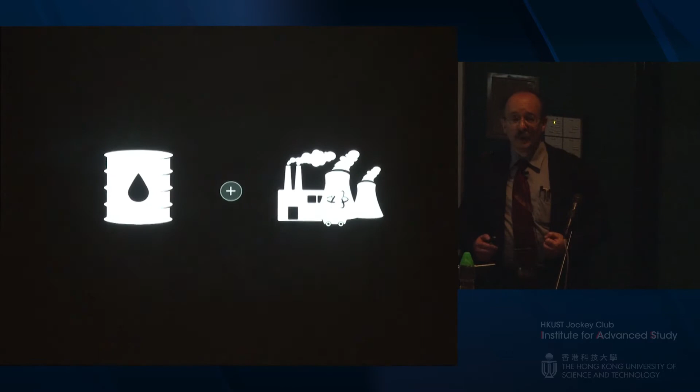4/5 of the world's energy still comes from burning each year about 20 cubic kilometers of the rotted remains of primeval swamp goo. Those fossil fuels have built our civilization, created our wealth, enriched the lives of billions of people, but their rising costs to our security, health, environment, economy are eroding, if not actually outweighing their benefits. So we need a new fire. And switching from the old fire to the new fire means changing two big stories, oil and electricity, each of which puts 2/5 of the fossil carbon into the air.

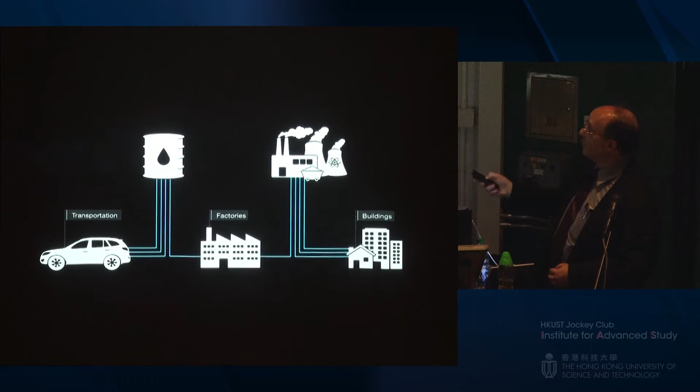These stories today are less than 1% connected in the United States, only a few percent connected in the world, but their uses are similarly concentrated. 3/4 of the oil in the United States, for example, fuels transport, 3/4 of the electricity powers buildings, and the rest of both run factories. So very efficient vehicles and land use, buildings, factories will save oil and the coal that makes 2/5 of the world's electricity, and natural gas that can displace them both.

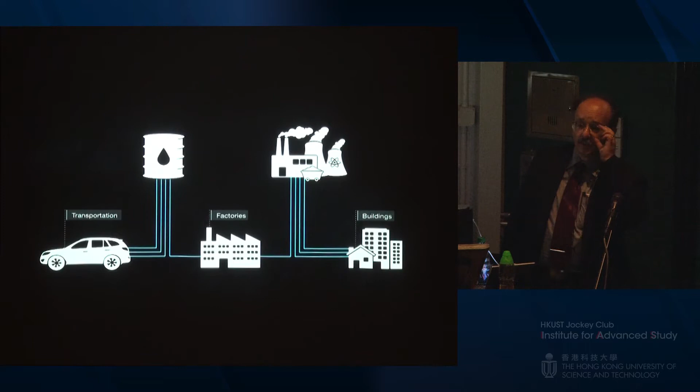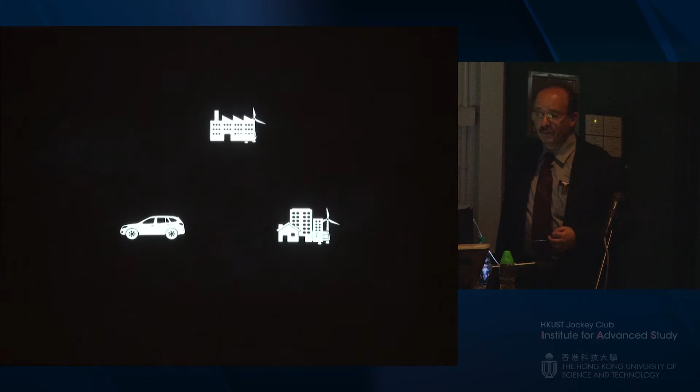But today's energy system is not just inefficient, it's also disconnected, aging, dirty, and insecure, so it needs refurbishment. By 2050, though, it could become efficient, connected, and distributed with elegantly frugal vehicles, buildings, and factories, all relying on a secure, modern, and resilient electricity system.

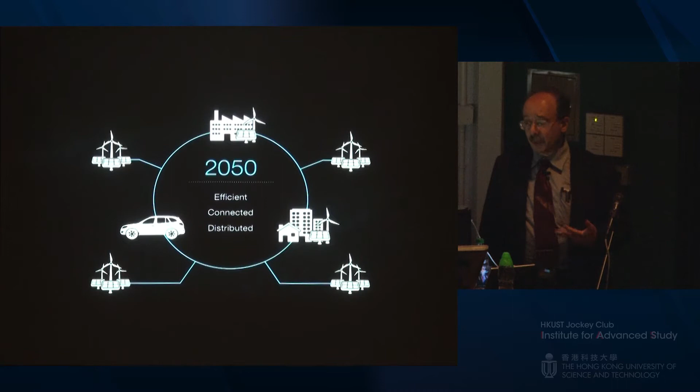The United States, for example, could eliminate its addiction to oil and coal by 2050 and use a third less natural gas, whilst switching to threefold more efficient use and three-quarters renewable supplies. That's the transition I will summarize.

We found that by 2050, this could cost the United States $5 trillion less in net present value than business as usual, assuming that all carbon emissions and other hidden or external costs are worth zero, a conservatively low estimate. But this cheaper energy system could support a 2.6-fold bigger economy, all without needing any oil, coal, or nuclear energy.

This transition would need no new inventions and no new national taxes, subsidies, mandates, or laws, thus going around Washington gridlock. So I'm going to tell you how the United States can get completely off oil and coal, $5 trillion cheaper, with no act of Congress, led by business for profit. Many policy changes are needed to enable and speed this transition, but they can all be done administratively or at a subnational level.

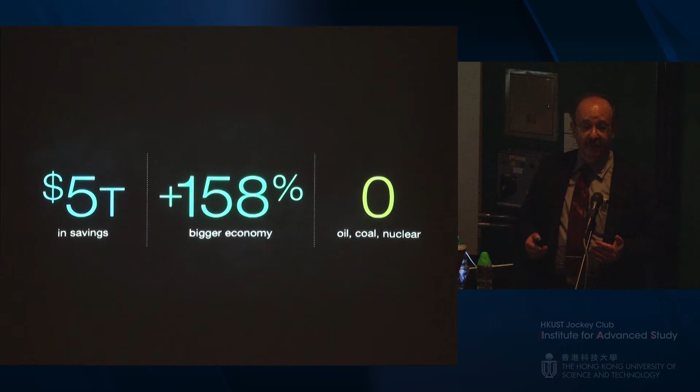In the United States, as in China, the mountains are high and the emperor is far away, and much of our initiative comes from the subnational level, for example from the SAR. So don't think that what you do in this small place is unimportant - it can have a huge influence on all of China, Asia, and the world.

And in the United States, of course, we've long made most of our energy policy at the state level anyway, rather than the national level.

So the idea is to use our most effective institutions, which in America means private enterprise co-evolving with civil society, sped by military innovation, to go around our least effective institutions. And this is also trans-ideological, because whether you care most about profits and jobs and competitive advantage, or national security, or environmental stewardship, creation care, climate, public health, reinventing fire makes sense and makes money.

Now, normally, if we have a tough problem, we take the cleaver and try to chop it into smaller bite-sized pieces, but this actually makes it more difficult. General Eisenhower had some better advice: that expanding the boundaries of a tough problem makes it soluble by including more options, more synergies, more degrees of freedom - everything that the solution requires. So we need to move the boundaries of the problem out, not in.

Therefore, in Reinventing Fire, we integrated all 4 sectors that use energy: transport, buildings, industry, and electricity. And we integrated 4 kinds of innovation - not just technology, but also design, the way technologies are combined, and not just public policy, but also new business models and new competitive strategies. These combinations give much more than the sum of their parts and often create some deeply disruptive business opportunities.

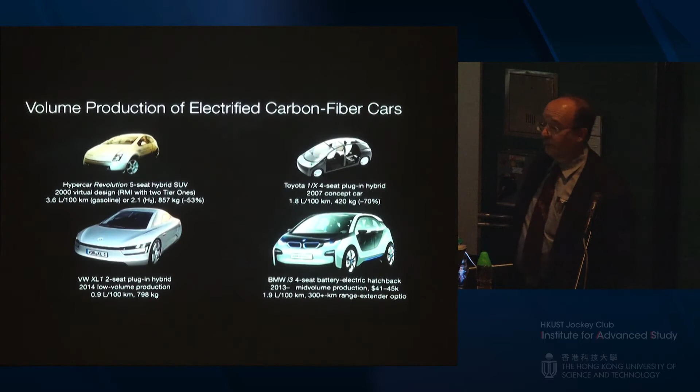And now 1 and 2 liter equivalent per 100 kilometer carbon fiber electric cars are on the market from Volkswagen and from BMW, which confirm that the carbon fiber is paid for by needing fewer batteries.

I brought along a carbon cap today. It's a test piece for military helmets that have been shipping for a few years. It's a bit of carbon fiber and thermoplastic that was made with a process one of our spin-offs developed and then spun off to the global supply chain 2 years ago.

This process that made this part in 1 minute 8 years ago can now make a complex 2x2 meter part in 1 minute. Don't worry about dropping it - it's tougher than titanium. The journalist Tom Friedman hit it with a sledgehammer as hard as he could and couldn't even make a mark on it.

So if we made all US autos in this way, we would save 1.5 Saudis, or half an OPEC worth of oil - 15 million barrels a day - by drilling in a very prospective play called the Detroit Formation. And the cost of saving a barrel this way is about $18 and falling.

That's to pay for the electrification. The ultralighting turns out to be approximately free, paid for by the 3 times smaller powertrain and by much simpler automaking with 80% less capital. There are so few parts and they snap precisely together without needing a body shop or a paint shop.

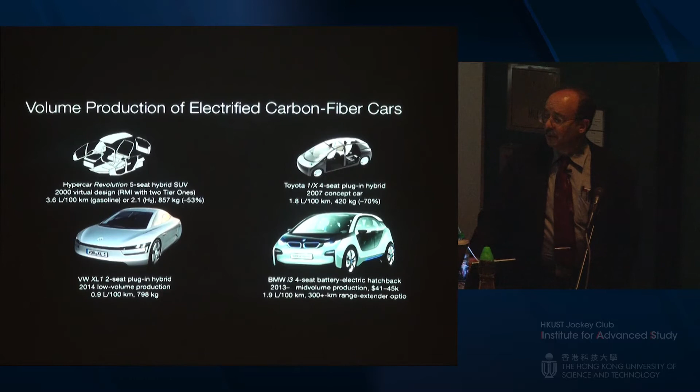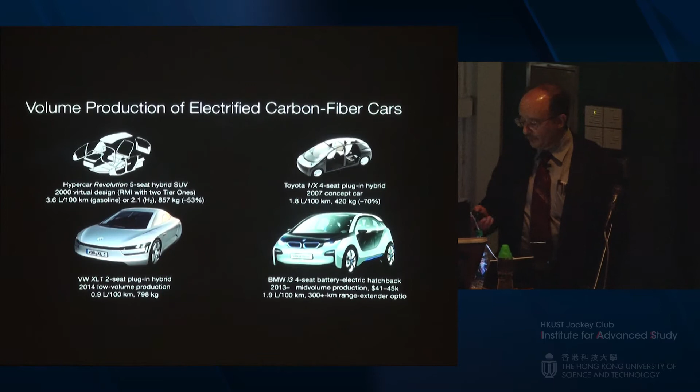Now, ultralight electric vehicles can spread and their prices can drop even faster with a temporary policy called a feebate, that is rebates for efficient new cars paid for by fees on inefficient ones. The biggest of 6 feebate programs in France tripled the speed of improving auto efficiency in the first 2 years, and the strongest feebate in Norway raised electrified vehicles market share to 12.5% last year, which is 10 times the US level. There is also a new feebate in Singapore.

The same sorts of physics and business logic apply also to heavy vehicles. Walmart's heavy lorries now move each case of product using half the fuel that they used 10 years ago through both logistical and technical improvements. And that plus just the technological improvements fully pursued can save 2/3 of the fuel in heavy lorries. And that plus the tripled to quintupled efficiency airplanes designed at Boeing, NASA and MIT can save the United States $0.9 trillion US net present value.

But in both heavy and light vehicles, today's military revolution in energy efficiency will speed all these advances in the civilian sector, which uses over 50 times as much oil, much as military R&D gave us the internet, the global positioning system, the jet engine and microchip industries, only this time that leverage back to the civilian sector can speed America's and China's path off oil so nobody needs to fight over oil, and our respective warfighters can have zero missions in the Persian Gulf and the South China Sea. Mission unnecessary. They really like that idea.

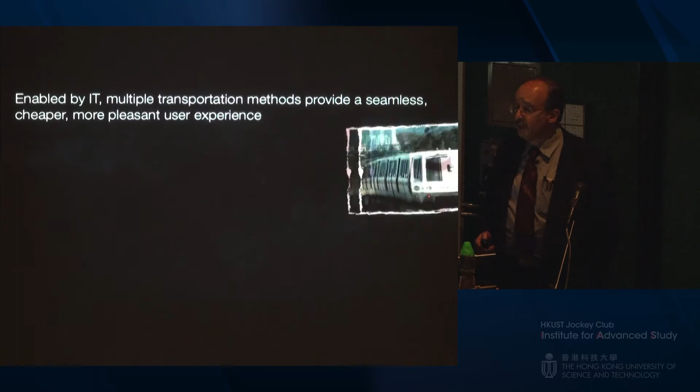Autos are not just becoming 4 to 8 times more efficient, they're also being driven less, even in Europe and America, where petrol use has been falling since 2007. Generations X and Y tend not even to want to own a car because it's cheaper and easier not to. A young Londoner or Shanghainese on an evening out can combine many different modes because smartphone apps bridge the once awkward route gaps by summoning ubiquitous transport services on demand.

One lady in San Francisco just blogged that she was saving $11,000 US a year by replacing her car with Uber, Lyft, public transit like the local version of the MRT, walking, biking, and a smartphone app called Getaround, which lets you hire a neighbor's car when it's unneeded and parked, as US cars are 96% of the time. So seamlessly linking access options with needs makes you confident you won't need a car. But if you did, you don't need to own it.

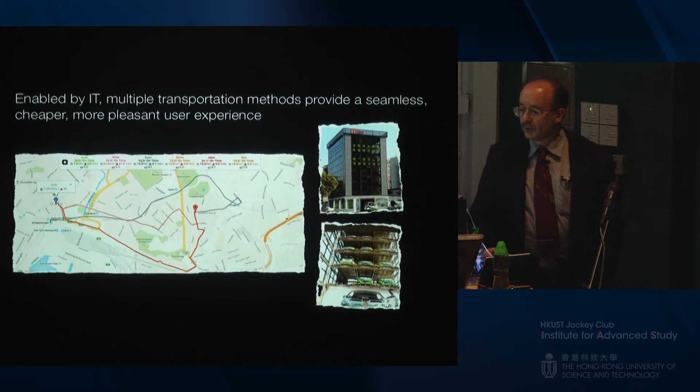In some Chinese cities, renting a Kandi electric vehicle from this giant vending machine costs about 25 Hong Kong dollars an hour. Also, renting shared cars when you need them can boost their utilization by about tenfold, and then probably redouble it with partly or fully autonomous vehicles like this Mercedes concept car.

Google actually plans to release self-driving cars in the next 3 years. The biggest American company, which is called Apple, is developing them too. They're already legal in 4 of the United States, and they are the theme of the European Union presidency by Holland next year.

Autonomy makes electric vehicles' total cost per kilometer about 40% lower than that of fueled vehicles because their tenfold lower energy cost per kilometer more than offsets their higher capital cost. So the mashup of mobility with IT means radically fewer vehicles, all electric, driving a lot fewer total kilometers. Shared EVs providing mobility services could drive easily 1 million kilometers in their lives because the carbon fiber doesn't dent, rust, or fatigue. So autos are morphing, as we made up this acronym, from pigs to seals, that is, from personal internal combustion gasoline steel-dominated vehicles to shareable electrified autonomous lightweight service vehicles.

Their business and marketing case is strong, and they will further speed the day when cars use no oil.

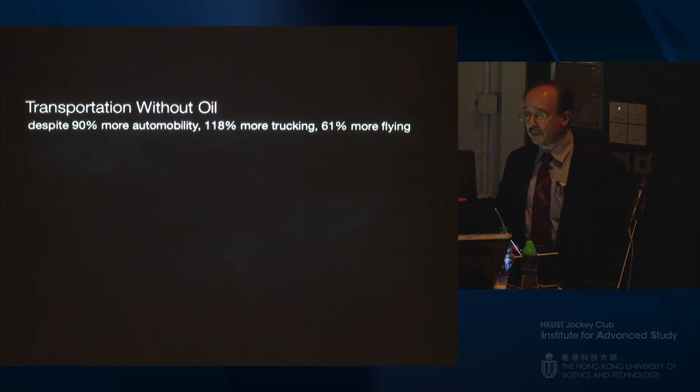Saving or displacing each barrel at an average cost that works out to about $25 US, rather than buying it for over 100, saves about $4 trillion net present value, or about 12 trillion if we'd counted just the hidden economic and military costs of US oil dependence.

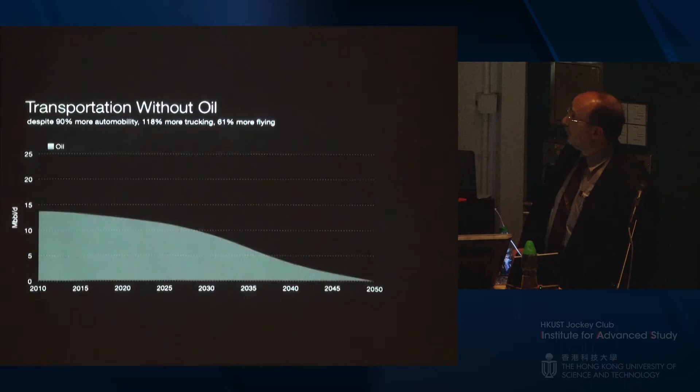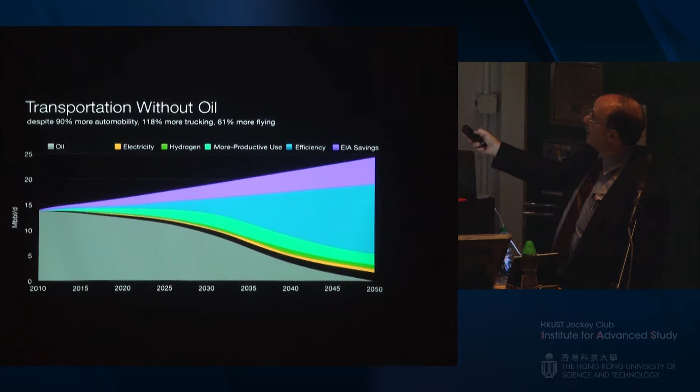In green, electricity in yellow, and advanced biofuels in orange. The heavy lorries and airplanes can realistically use advanced biofuels or hydrogen. The lorries could even burn natural gas, but no vehicles will need oil.

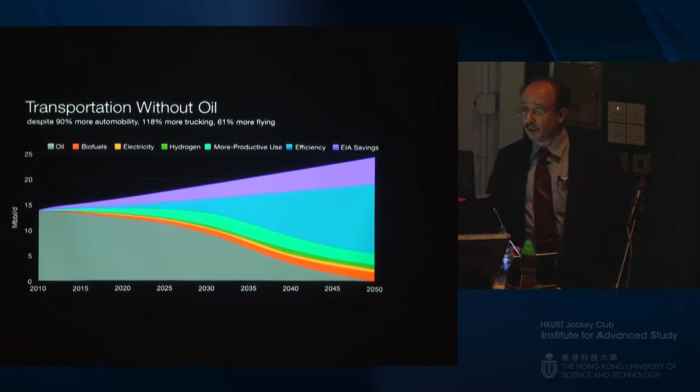And any biofuels the U.S. might need, at most 3 million barrels a day, could be made two-thirds from waste and without displacing cropland or harming climate or soil. So our little team speeds these oil savings by institutional acupuncture.

That is, where the business logic is congested and not flowing properly, we insert little needles in carefully chosen spots in partners like Ford and Walmart and the Pentagon to get that entrepreneurial juice flowing. And this long transition is already so well underway that 5 years ago, some mainstream analysts began to see peak oil not in supply but in demand.

Because like whale oil in the 1850s, oil is becoming uncompetitive even at low prices before it becomes unavailable even at high prices.

But electrified autos need not add new burdens to the electricity system. Rather, when smart autos exchange electrons and information through smart buildings with smart grids, they are adding to the grid valuable flexibility and distributed storage that can help the grid to accept varying solar and wind power. So electrified autos make the auto and electricity problems easier to solve together than separately.

And they also converge the oil story with our second big story.

And by the way, the guy that said that just got promoted.

Our second big story, which is saving electricity and then making it differently. And those twin revolutions in electricity are already bringing more numerous, diverse, and profound disruptions than in any other sector, as 21st century technology and speed collide head-on with 20th and even 19th century institutions, rules, and cultures.

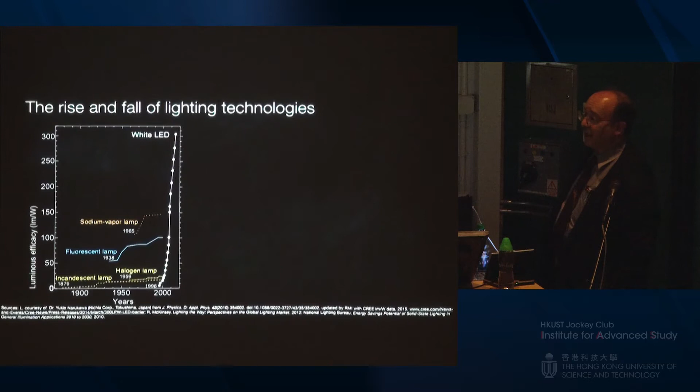But then, like a thunderbolt, came white LEDs. Each decade, they get 30 times more efficient, 20 times brighter, and 10 times cheaper. That's why McKinsey forecasts they will cut costs and grow revenues 30% a year, and 5 years from now will have taken over two-thirds of the world's general lighting market.

So they're rocking the $200 billion a year lighting services market, and since lighting uses one-seventh of the world's electricity, they're also disrupting the business model of electric utilities because it's the wrong model.

You see, Thomas Edison, when he developed the grid in the early 1880s, didn't sell kilowatt hours. He sold light. He would charge you a penny to run a lamp for an hour. And he probably didn't foresee that his lamps would ultimately become so antique they would be outlawed.

But he certainly did see that lamps would become far more efficient. He said to his colleagues who wanted to stop selling light and start selling kilowatt hours so they could serve motors as well, look, I can tell you as an inventor, lamps will become much more efficient. And when they do, if we're selling lighting services, our cost of providing that service will go down. Whereas if we're selling kilowatt hours, we will simply sell fewer of them. It's the lamp makers who will make the profit.

They overruled him in 1892 at the New York Edison Company, and we've been making the same mistake ever since, selling the kilowatt hour, not the service people want it for, and therefore ensuring that as customers get more efficient, the electric company will have less revenue rather than less cost.

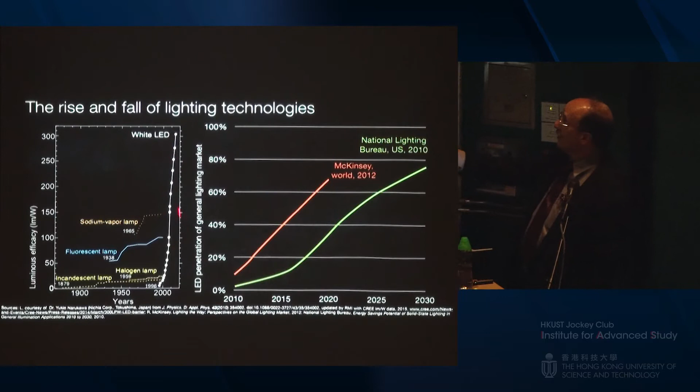Please remember, by the way, the steep slope of this LED efficiency curve, because we're going to see it again in a few minutes in a graph of the cost of photovoltaics, which in physics terms are rather like LEDs inside out.

Now, changing how we make electricity gets easier as we need less of it. Today, most of it is wasted, and efficiency techniques keep improving faster than they're installed, so the potential savings, the resource of negawatts still unbought, keeps getting bigger and cheaper. You know, the low-hanging fruit grows back faster than we can pick it.

But as buildings and industry start to catch up and get efficient faster than they grow, America's electricity use, instead of growing 1% a year as officially forecast, could actually shrink 1% a year after allowing for the extra use by efficient cars. And that's actually happening. U.S. electric use peaked in 2007, and we can keep it dropping by reasonably accelerating existing trends.

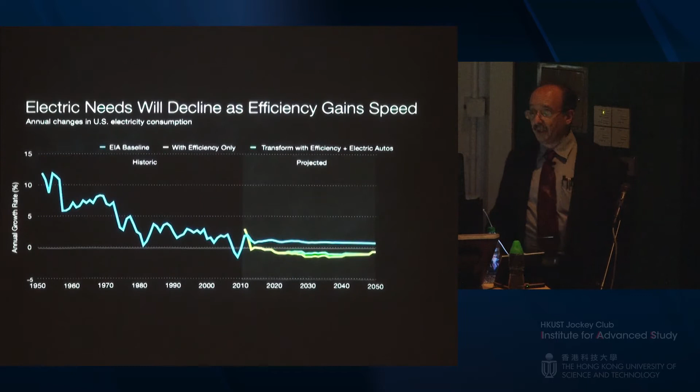Specifically, our analysis found over the next 40 years, U.S. buildings can triple or quadruple their energy productivity, saving $1.4 trillion US net present value with a 33% internal rate of return. So the savings are worth 4 times their cost.

Industry can also accelerate, doubling its energy productivity with a 21% IRR. And to do all that by 2050, we would need, by 2030, just to ramp up the national average adoption of efficiency to levels that were achieved 10 years ago in our northwestern states.

The key to such big savings is a disruptive innovation we've hatched at our institute called integrative design. It often makes very large energy savings cost less than small ones, turning diminishing returns into expanding returns.

I mentioned briefly how lightweighting autos shrinks their propulsion system, helping enable and pay for the advanced electric propulsion because you need 3 times fewer batteries. Well, in the same way, integrative design can do this for buildings and factories, radically reducing electric and gas demand so renewables can more readily serve the rest.

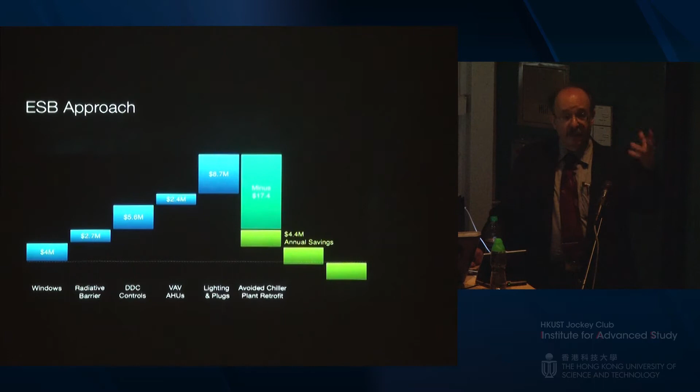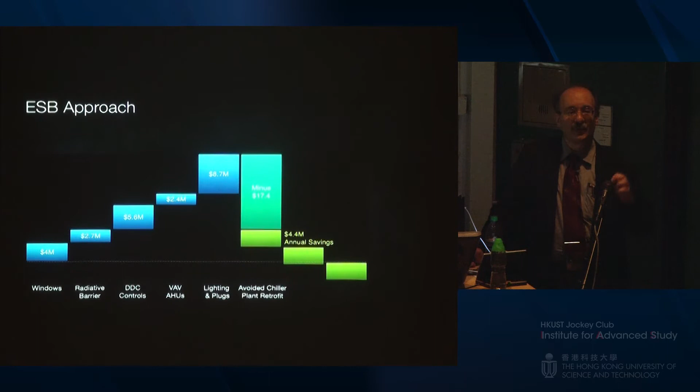Another example, in a retrofit design for an 18,000 square meter curtain wall office building in Chicago with dark double glazing whose seals had failed, so you have to replace them every 20 years, 3/4 of the total energy could be saved by an integrative retrofit costing slightly less than the regular 20-year renovation that saves nothing. It was about a negative 5-month payback.

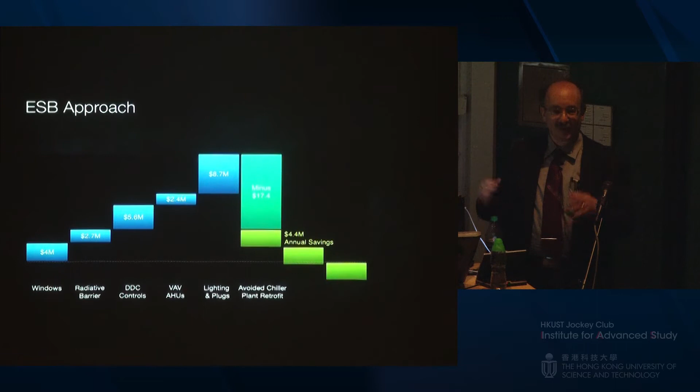And that's because the mechanical system could become not 1/3 smaller as in the Empire State Building, but 3/4 smaller, because it's all glass rather than mostly opaque wall area.

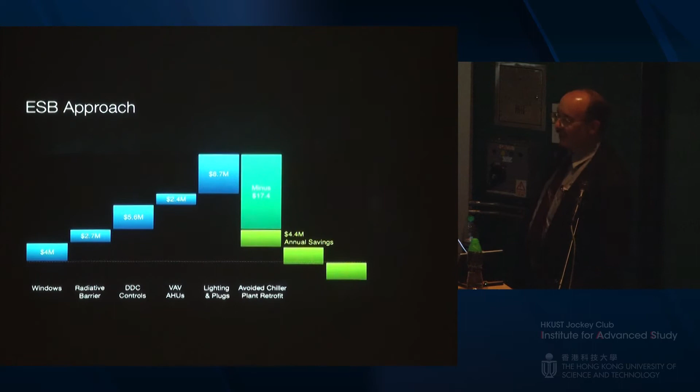Chicago is about as hot and humid in the summer as Hong Kong, but much colder in the winter. Let me give an example now for a small building, not because I think you have single-family houses here, but to make a point about building physics. It gets harder with small buildings because they have a bigger surface-to-volume ratio. My example is about how to create a little bit of Hong Kong climate high in the Rocky Mountains of western Colorado. That's where I live.

This is my house and research center and indoor farm. It's 2,200 meters up near Aspen, where temperatures used to dip as low as -44 Celsius, and you can get continuous midwinter cloud up to 39 days. This helped inspire over 30,000 European passive buildings that, like this one, need and have no heating system, but have roughly normal construction costs, and they can look like whatever you want.

Now let's go into the central atrium under super windows that insulate like 16 sheets of glass, but look like 2 and cost less than 3. And inside, it looks like Hong Kong or Hainan.

But this is in a February snowstorm, and there are 5 banana crops ripening. This is a twin crop we harvested recently - actually it harvested itself by pulling down the tree, and we're now on banana crop number 58.

When I moved in 1984, this house was saving 99% of the normal space and water heating energy, about 90% of the household electricity and half the water, all with a 10-month payback. That's 1983 technology. Today's are much better, so we've lately retrofitted them, and we're measuring how much better they are.

The trouble is that they seem to use less energy than the monitoring system that's measuring them. So we do no combustion in this house - that's so 20th century. And our house is a net exporter of electricity and bananas.

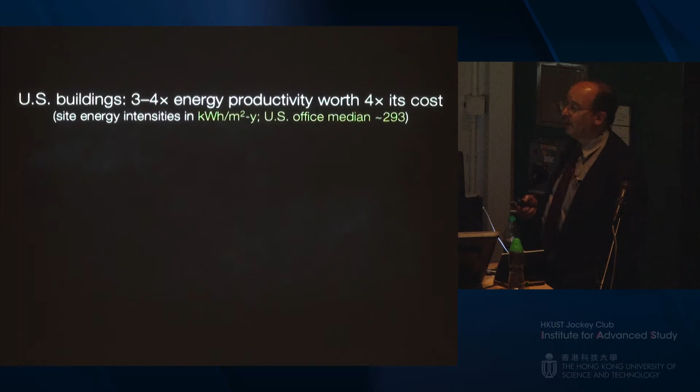How fast is the state-of-the-art moving? Well, we thought the 38% energy saving wasn't too bad for the Empire State Building when we did that retrofit 5 years ago. 3 years later, we saved 70% retrofitting this difficult old federal government office building in Denver, and with a good economic case.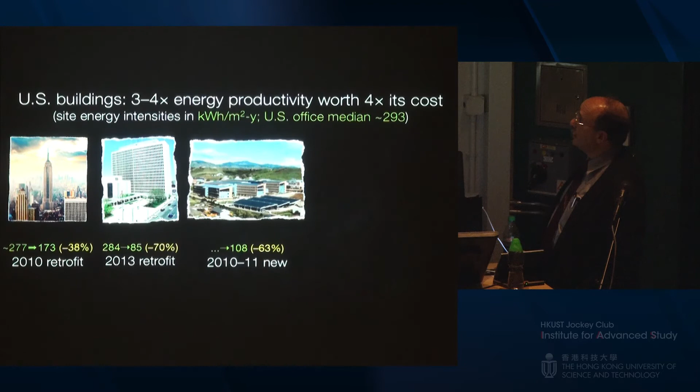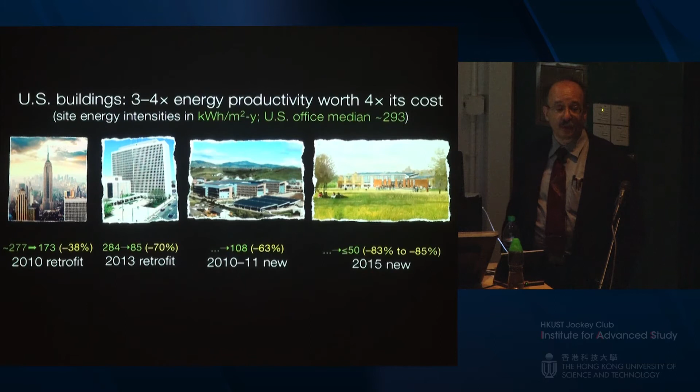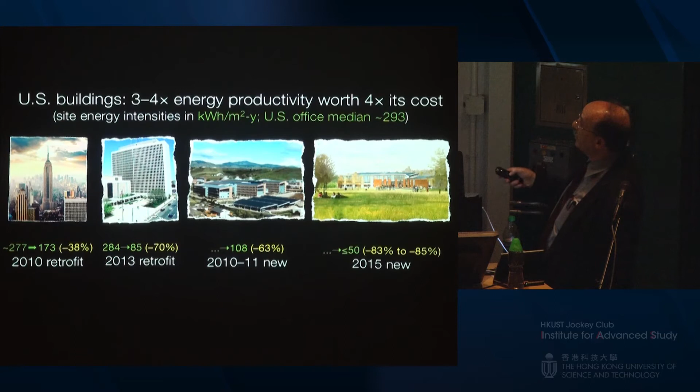And that made it a little more efficient than the most efficient new U.S. office, which in turn is only half as efficient as our own new office being built right now with no central heating or cooling equipment and a good business case. That's how fast the state of the art is moving - from 277, or a national median 293 kilowatt hours total energy use per square meter year measured at the building, to nowadays 40 or 50.

And actually somewhere in that range has already been achieved by the Bullitt Foundation office in cloudy Seattle. And of course, that building and our building are both net exporters of electricity. Even in the worst hot, humid climates, in Singapore and in India, our partners are likewise saving about 80% of the energy with 10 or 20% lower capital cost, and then the photovoltaics on the building make the rest.

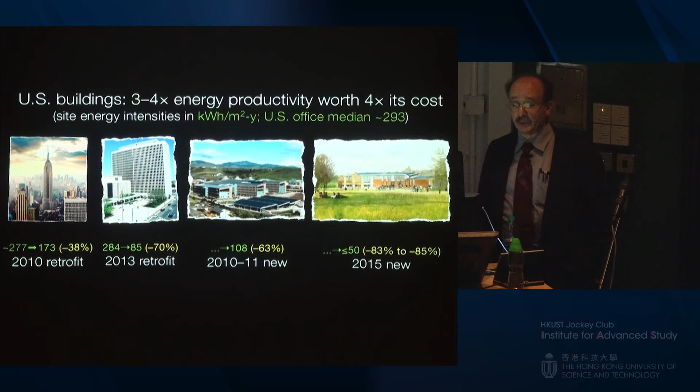And I think in Hong Kong you should demand similar performance, but here's an interesting opportunity. Dutch social housing, only say 2 stories high - this is a 5-unit building - has about a 1.5 or 2,000 euro per unit per year energy bill.

But now a consortium of the developer BAM, social housing corporations, and several public partners are doing mass efficiency upgrades of ordinary flats so they will produce at least as much solar energy as they use. That is, they're being retrofitted to net zero by the means described. And they are very close now, by industrializing the retrofit process in the first 11,000 units, to being able to do this without subsidy. They think they'll be without subsidy within about another year because the saved energy finances the retrofit, even to net zero standard.

Now, to be sure, Hong Kong has a completely different climate and culture and building style, but we could quickly learn by doing how close we can get in your high-rise housing to net zero energy, and how much of the retrofit can be standardized and mass-produced, as the Dutch designers are doing.

So there may also be some interesting side benefits. For example, if you do distributed capture of the distilled water from condensate, that should reduce the costs of buying water and having to pump it up in the building, which is a very large use of electricity in Hong Kong.

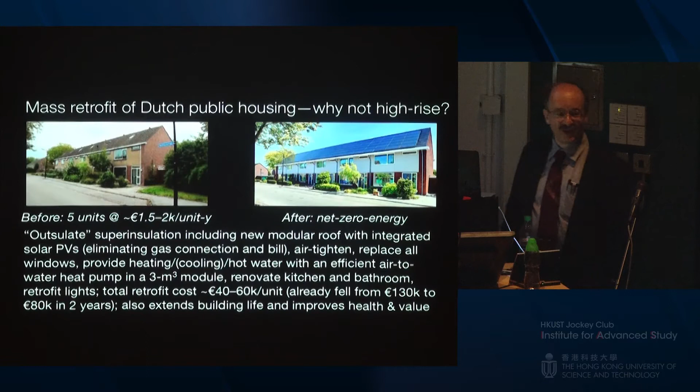Integrative design can also increase the savings in industry. Dow Chemical, for example, has saved $9 for every dollar it's invested in efficiency, but there's much more to do.

For example, 3/5 of the world's electricity runs motors, half of that runs pumps and fans, and we can make those much better. There are about 35 things we can do as an integrated package to save half the energy in the motor systems with about a year's payback.

But first, we should be capturing bigger and cheaper savings normally ignored, not in the textbooks, not in the forecasts. For example, pumps. The biggest use of motors move liquids through pipes.

But using techniques from my Chinese mentor Lee Eng Lock in Singapore, a typical industrial pumping loop for a Shanghai factory was redesigned to use at least 86% less pumping energy, within the normal 80 to 90% savings range. Not by getting better pumps and motors and controls, but just by replacing long, thin, crooked pipes with fat, short, straight pipes. This also shrinks the pumping equipment and its capital costs.

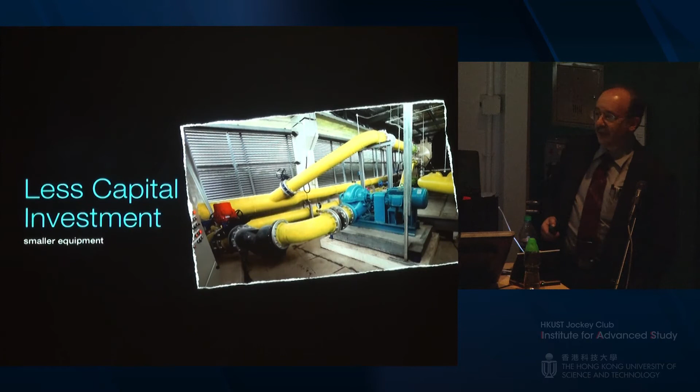So this is not a new technology. This is rearranging our metal furniture as designers. And in my own house, this method recently saved about 97% of the pumping energy in some new piping.

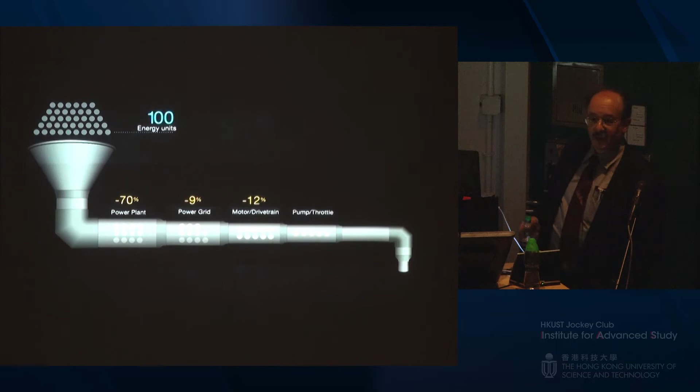Now, what does such savings mean for the electricity that is 3/5 used in motors? And I just told you about pumping, the biggest use of motors, and the second biggest use is fans, which have the same physics. Well, from the coal burnt in the power plant, there are so many compounding losses that only about 1/10 of the fuel energy comes out the pipe as flow.

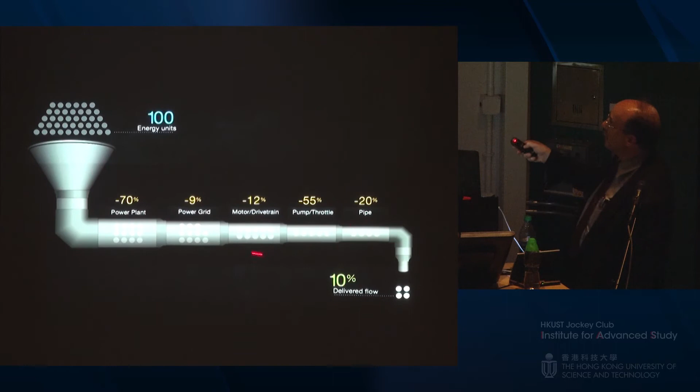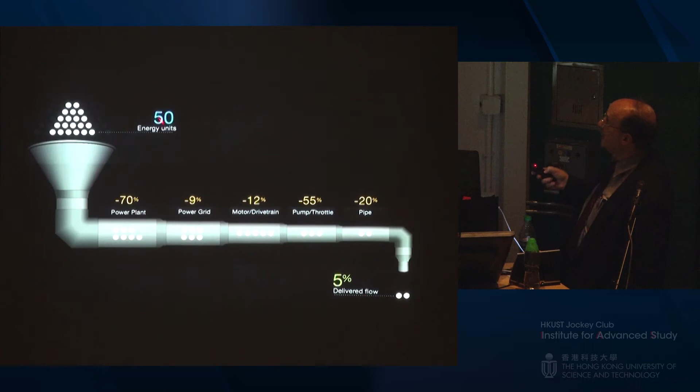But if we turn those compounding losses round backwards, right to left, they become compounding savings, and every unit of flow or friction we save in the pipe compounds back again to save 10 units of fuel cost, pollution, and global weirding back at the power station. And as we go upstream, the components get smaller and the capital cost goes down.

Our team has lately found such snowballing energy savings in over $40 billion worth of diverse industrial redesigns, from this Hewlett-Packard data center and Texas Instruments chip fab to Rio Tinto and Anglo-American mines and Shell hydrocarbon facilities and many others. And typically we find the retrofit designs save about 30 to 60% of the energy with 2 or 3 year paybacks, whilst the new facility designs do a bit better, around 40 to 90% savings, with generally lower capital cost.

This data center is particularly interesting because I understand you have a lot of them here. We were doing this with EDS, which at the time was becoming part of Hewlett-Packard. And because the client wouldn't allow most of the recommendations to be adopted, they were extraordinarily conservative, we were only able to triple the efficiency with the same capital cost.

However, EDS said that had the client allowed them to adopt most of the recommendations EDS agreed with, which was almost all of them, we would have saved roughly 95% of the energy and half the total capital cost. That's, I think, where the state of the art was 5 years ago. Now it's rather better than that.

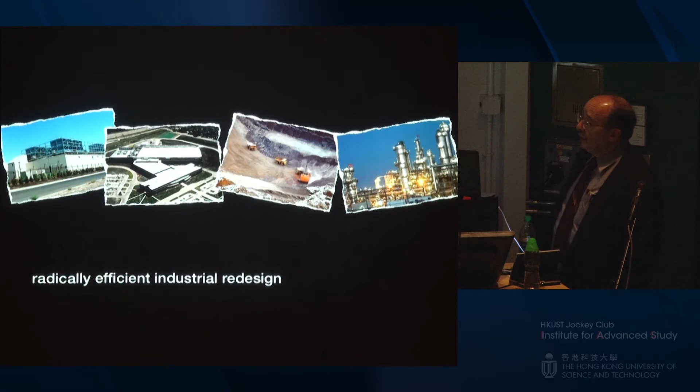Now, as buildings and industry get efficient faster than they grow, the electricity demand has fallen in the United States as in Europe and Japan, and this helps renewables displace coal and gas-fired electricity. So on a logarithmic scale, here's what happened already to the price of photovoltaic modules and of wind farms.

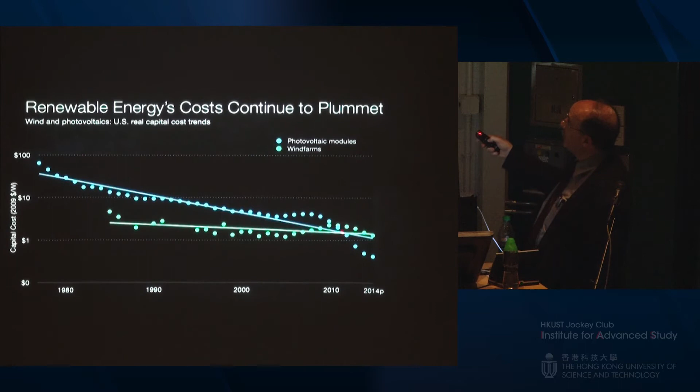So it's not surprising that renewables have lately been about 2/3 of the new capacity added in China, over 70% in Europe, about half in the United States. And in 20 of the United States, entrepreneurs will now install rooftop photovoltaics with no money down, soon cash back, and beat your electric bill. Deutsche Bank says this will be profitable in about 80% of the world in 2 more years.

I think they're right. And bypassing electric companies the way mobile phones bypassed wireline phone companies gives electricity executives nightmares and venture capitalists sweet dreams.

The batteries, too, are getting rapidly cheaper. The technology driven by consumer electronics, the volume driven by electric cars, that lets more customers drop off the grid altogether if they get annoyed with their electric company. And this leaves the old utility business models no place to hide.

We wrote a paper on this called The Economics of Grid Defection, showing that the ability to do so would roll across the United States well within the lives of existing utility assets. And partly as a result of that paper, Barclays downgraded the whole US utility sector, which interestingly in the capital market today pays about 200 or 300 basis points more for capital than the solar installers like SolarCity are paying. That is, the investors have decided that utilities are the risky play and solar is the low-risk play.

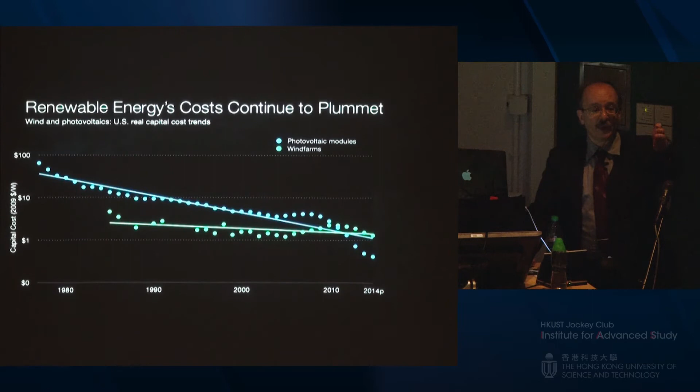The competition is not just in capital cost and risk, but also in revenue models. Renewables have no operating costs, so when you flip the switch, you aren't sending your utility any more revenue. His new oil or gas well makes my next one cost more. Her new solar panel makes my next one cost less. Do you really think fossil fuels are going to win that game?

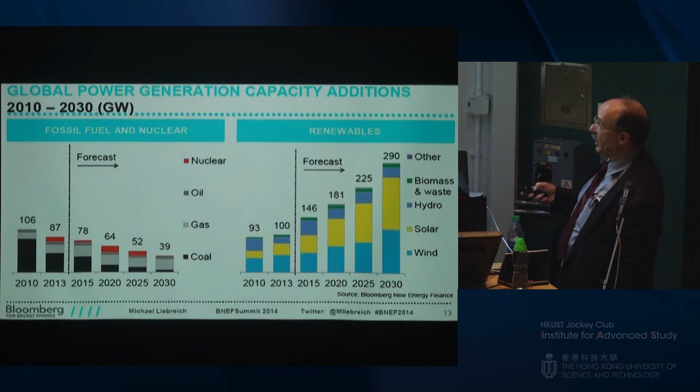Bloomberg thinks not, and they project in the next 15 years the added capacity from fossil and nuclear plants will go down by half, not counting their larger retirements, whilst the additions by renewables will treble. Here's the market evidence of how that works.

They have surpassed the total installed capacity worldwide of nuclear energy, which actually had a loss of capacity even before Fukushima. And the global orders for nuclear and coal plants continue to fade away because they have too much cost and too much financial risk to attract investors.

Interestingly, by far the dominant force in these renewable markets is China, which in 2012, 13, 14, made more wind power than nuclear power. In 2013, China added more solar electric capacity than the United States has added since we invented photovoltaics 60 years ago. That happened in 1 year.

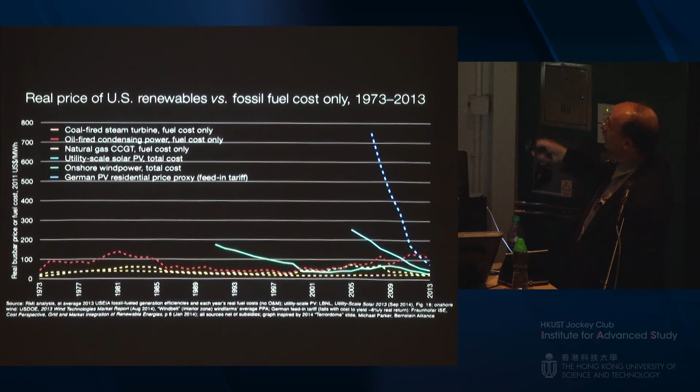And this disruption is just starting. This graph shows a meteor strike - photovoltaics and wind - that just happened to just the fuel costs of fossil fuel generation. This is what a game changer looks like. And of course, it's self-feeding because the cheaper renewable power gets, the more we build. So the cheaper it gets, so the more we build.

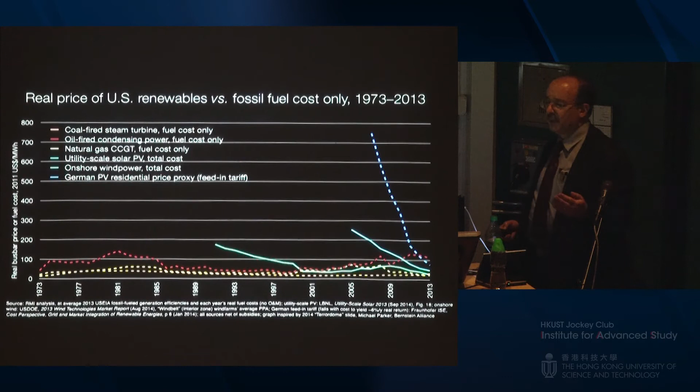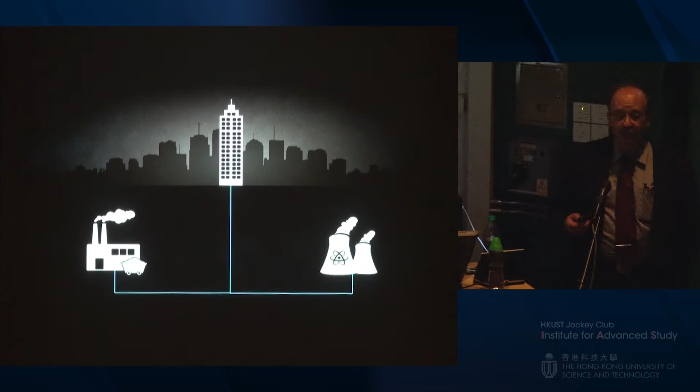However, we're often told that only coal and combined cycle gas and nuclear stations can keep the lights on because they are 24/7, whilst wind power and photovoltaics are variable and thus supposedly unreliable. So I'd like to explain why neither part of that statement is true. First of all, variable does not mean unreliable.

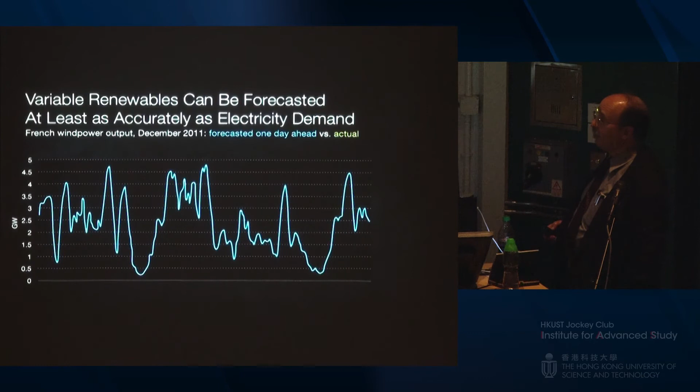Here is how accurately the French grid operator was able in a stormy winter month to forecast a day ahead the output of the country's wind farms in blue. The green is the actual a day later. And I'll bet they wish they could forecast demand that well.

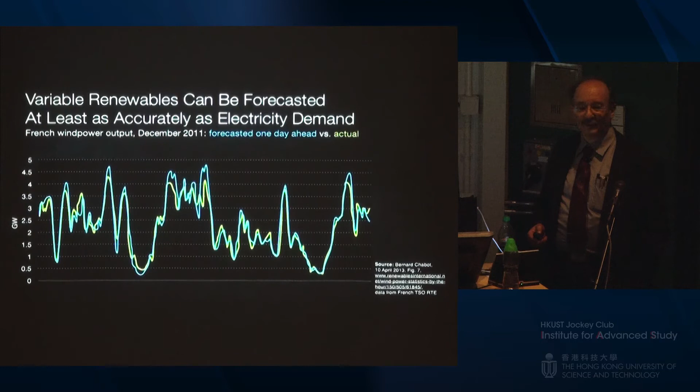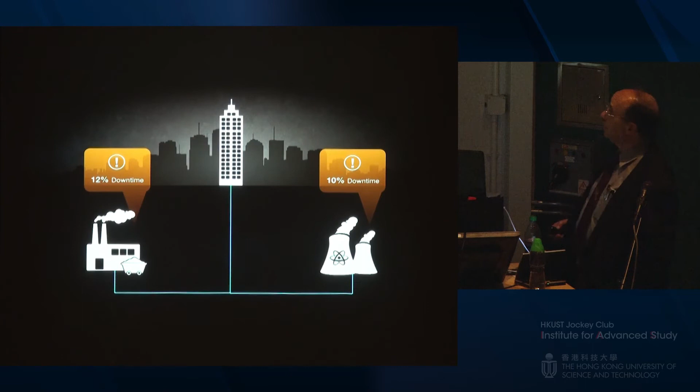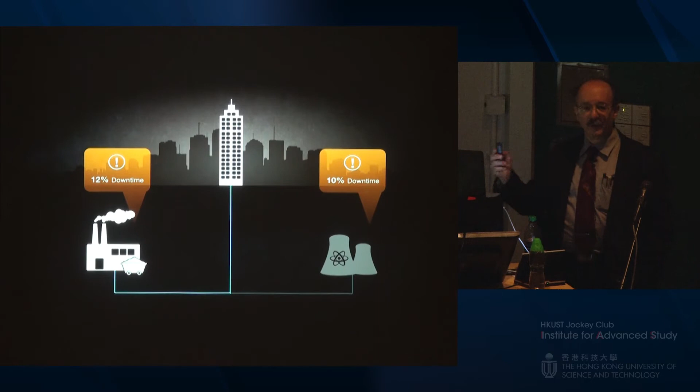Secondly, we built the grid because no generator is 24/7. They all break. And when a giant coal or nuclear plant fails, you lose 1 billion watts in milliseconds, often for weeks or months, often without warning. You have in Hong Kong an extraordinarily reliable electricity system, but some things break sometimes. And the reason we built the grid, and a lot of backup investment, was to handle this intermittence of the big thermal plants that come in big lumps. It's handled routinely by backing up failed plants with working plants.

But in the same way, and often at lower cost, the grid can handle the forecastable variations of solar and wind power by backing up variable renewables, mainly with other renewables of other kinds or in other places. So highly reliable power can come from a portfolio of largely or wholly renewable sources when they are forecasted, integrated, and diversified by type and location.

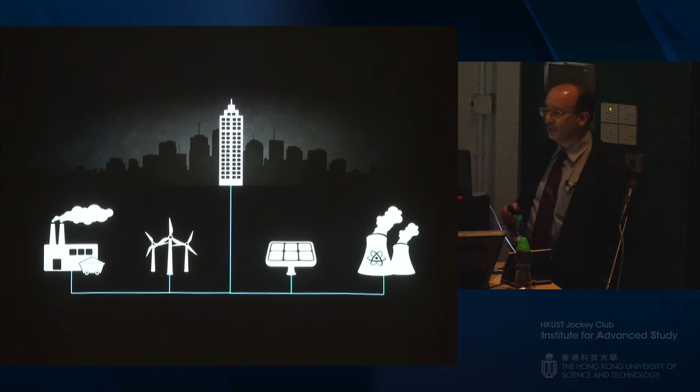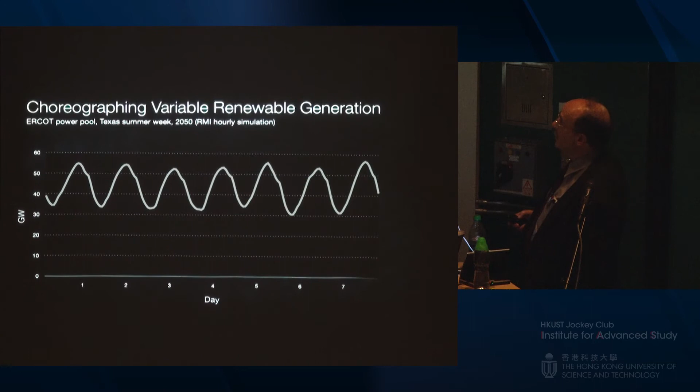Let me illustrate that with an aggressive but instructive simulation from the state of Texas. A power pool essentially coincident with the boundaries of Texas called ERCOT is isolated from the rest of the United States. It's not hooked to our eastern or western grid. It's a third grid all on its own. Its expected 2050 summer load shape is like this, or with more efficient use, it's smaller and less peaky, but it's still about 4 times the peak load of CLP.

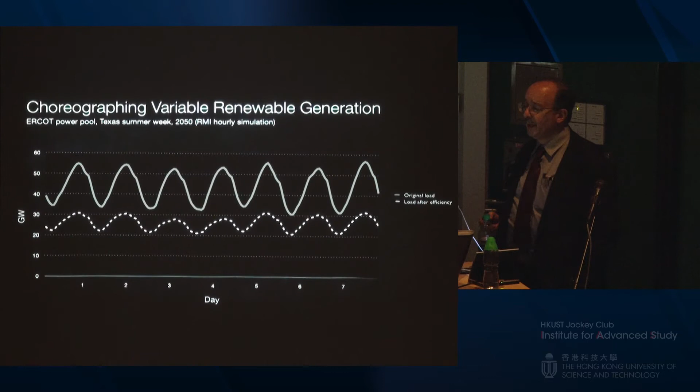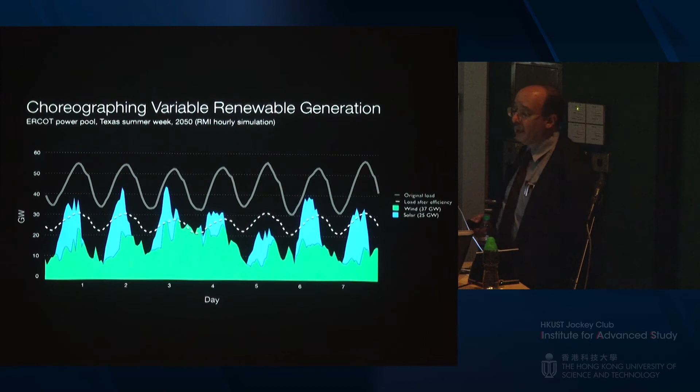Now, let's do all of this with renewables. The first 86% of the annual electricity needs could be met by a combination of wind and photovoltaics. You can see how variable they really are. And the other 14% from the other renewables, which are dispatchable. You can have them whenever you want, like geothermal, small hydro, solar thermal electric, biogas burnt in existing combustion turbines, municipal solid waste combustion. My favorite is burning obsolete energy studies.

And so now we've got 100% renewable supply, but you can see it doesn't match the load shape terribly well. Sometimes we have too much, other times not enough.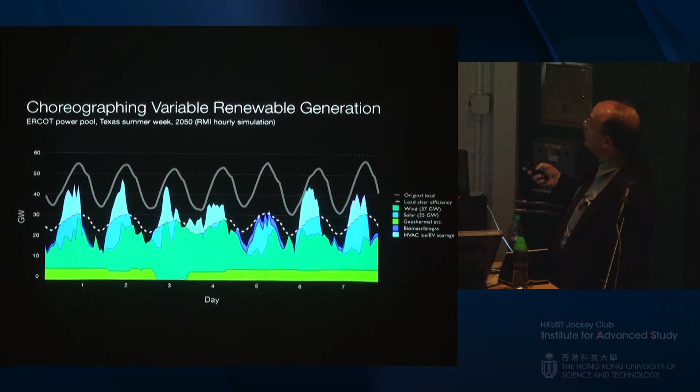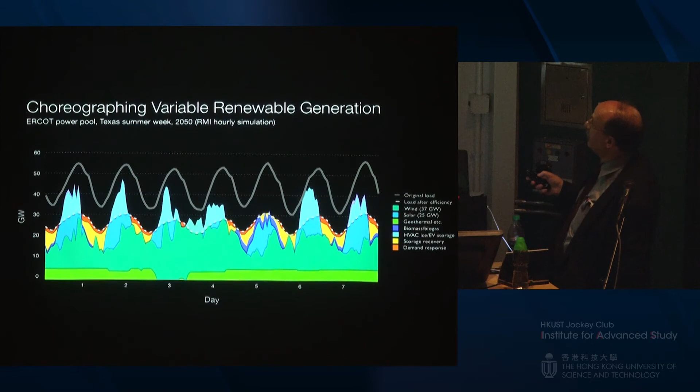But now let's take the surpluses and put them into two types of distributed storage. The only aggressive assumption here is that those will be fully built out by 2050, but it's actually quite feasible to do that. Two types in particular: ice storage air conditioning and smart charging and discharging of electric vehicles. Then we can recover those two kinds of distributed storage in yellow as needed, fill in the last bits with unobtrusively flexible demand that's invisible to the customer.

Now we've got completely renewable supply every hour of the year without adding any bulk storage and with only 5% of the renewable generation left over to be spilt. So the economics should be quite good.

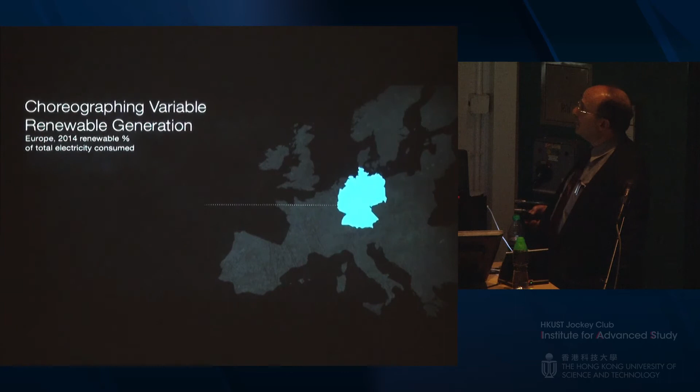This is, however, not just theory. Some national grid operators are actually doing this choreography already. Germany last year got 27% of its electricity consumption from renewables, half of them solar and wind. It's about 30% at the moment.

But there are actually 4 other European countries not rich in hydro that are up around half renewable. Denmark's around 55% last year, and Scotland 53%. We're just waiting for the final numbers from both. And out on the end of the Iberian Peninsula, Spain 46%, Portugal 64%. They both have hydro, but they're not Norway. They're doing most of it from other renewables.

None of these countries is adding bulk storage. They all have superior reliability. There's a general weak trend in Europe that the more renewables you put in, the more reliable your supply gets. And actually, Denmark and Germany have electric supply 10 times as reliable as America's.

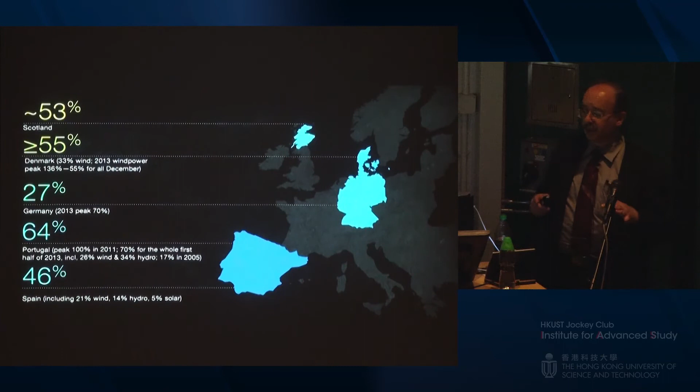So these grid operators have gradually figured out how to operate their systems, their assets, much as a conductor leads a symphony orchestra. No instrument plays all the time, but the ensemble continuously produces beautiful music.

I think what the evidence is increasingly showing is that largely or wholly renewable power systems may need actually less storage and backup than we've already installed and paid for to manage the intermittence of the big thermal plants. We aren't used to hearing it compared that way because we think of spinning reserve and reserve margin as inevitable system costs, but actually they are the integration cost of the big lumpy units that can fail all at once. Every resource has different integration costs. We have to compare them fairly, and when we do, quite often a good renewable portfolio will need less.

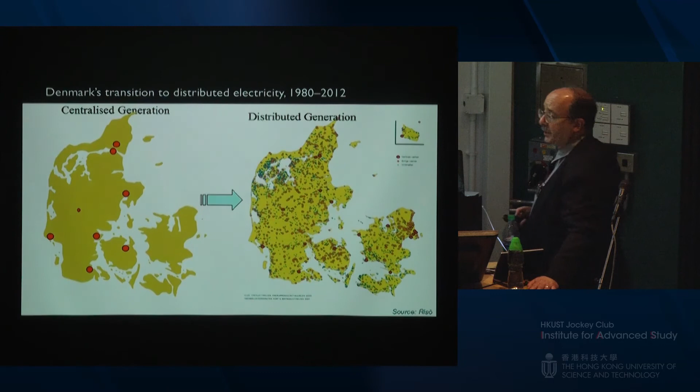Another important part is the right size of generation. Denmark is the best example. They went in 32 years from a handful of giant coal plants to a constellation of wind farms in blue and agricultural waste cogeneration in brown. And they have the most reliable electricity in Europe. It's almost all locally owned, by the way.

Denmark is planning completely renewable electricity and total energy by 2050, and they don't think it'll cost more. Meanwhile, they're switching their grid to a distributed so-called cellular architecture that makes cascading blackouts impossible.

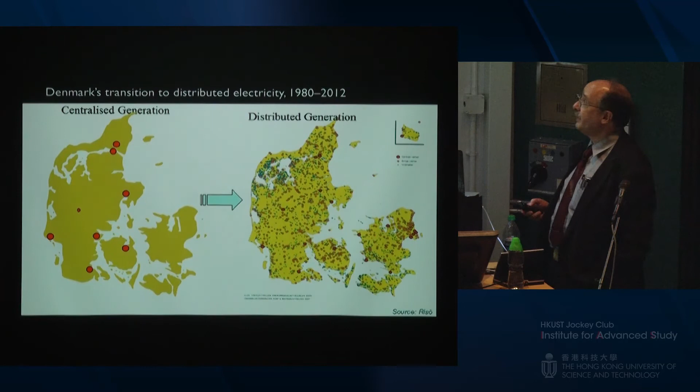And another way of looking at what's happening worldwide is these are the actual increases in electric output from what The Economist calls micropower, which is all the renewables except big hydro plus combined heat and power.

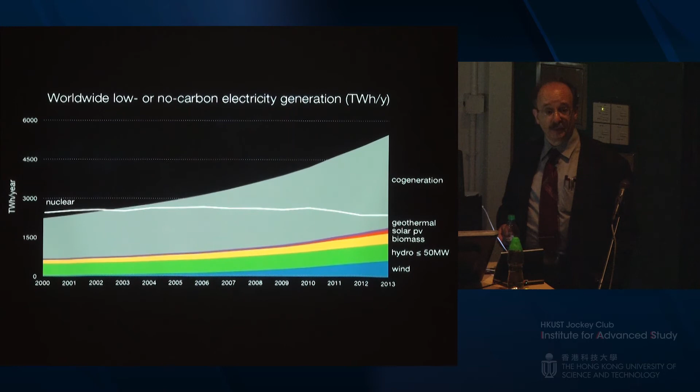Together they are a very large resource. They're a quarter of the world's electricity and half the new capacity being added. Not a fringe activity—they're running away with the market. Together, they and efficiency got about $600 billion plus US dollars of global investment in 2013 alone.

In America, we have this aging, dirty, insecure electricity system that we have to replace anyway by 2050. And whatever we replace it with is going to cost about the same, whether we buy more of what we have, or new nuclear and clean coal, or centralized renewables, or distributed renewables. But the surprise is that although these cost about the same, they differ profoundly in 7 kinds of risk around national security, fuel, water, finance, technology, climate, and health.

For example, we have this over-centralized grid, vulnerable to cascading and potentially economy-shattering blackouts caused by squirrels, tree limbs, operating problems, solar storms, superstorms, earthquakes, physical attack, cyber attack.

But this blackout risk disappears, and all the other 6 risks are best managed with distributed renewables reorganized into so-called microgrids that normally interconnect, exchange power freely, but can also, if needed, disconnect fractally, serve critical loads continuously, and reconnect afterwards seamlessly.

That is, by the way, the Pentagon's strategy for military power supplies. It's how my house works—very reassuring feeling. And at about the same cost as business as usual, this resilient grid architecture could maximize security, customer choice, entrepreneurial opportunity, and innovation.

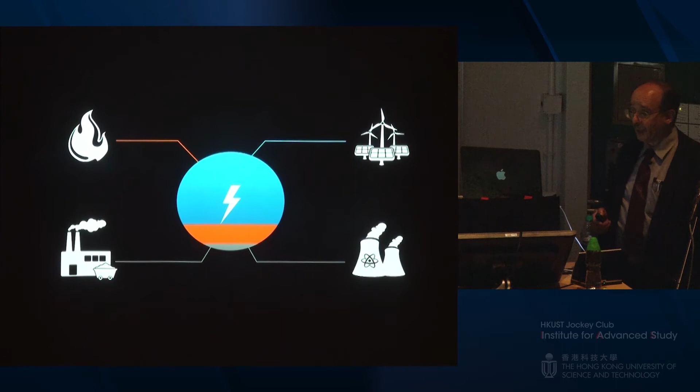And that is most true in the 30-odd states where demand-side and supply-side options compete directly against each other in the same auctions. We've had auctions lately where 90-odd% of the winners are on the demand side once they're actually allowed to compete, megawatts against megawatts. That sounds like a really good idea.

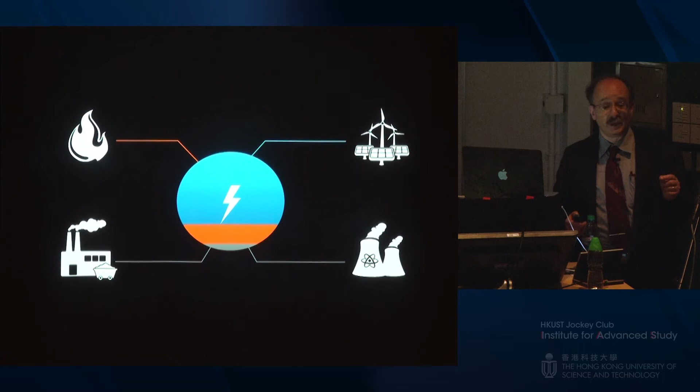And these transitions can be awfully fast. The Stanford Lecturer in Innovation, Tony Seba, found these lovely archive photos of an Easter parade on Fifth Avenue in New York. In 1900, you have to look rather hard to find the first car, which is, let's see, where is it? I think it's right there.

And 13 years later, you have to hunt awfully hard to find the last horse. The horse and buggy companies thought they would have forever to make a transition, long after they retired, because you have to build all the roads and petrol stations and traffic lights, signals. But Henry Ford disagreed, and he won.

I think the lesson of this is that the pace of transformation is set not by incumbents, but by insurgents. They are not inhibited by the incumbents' business models, cultures, legacy assets, both physical and psychological.

By the way, the Model T Ford had a nominal price that fell 62% in 13 years. Photovoltaics have fallen 80% in 5 years. And they're accelerating.

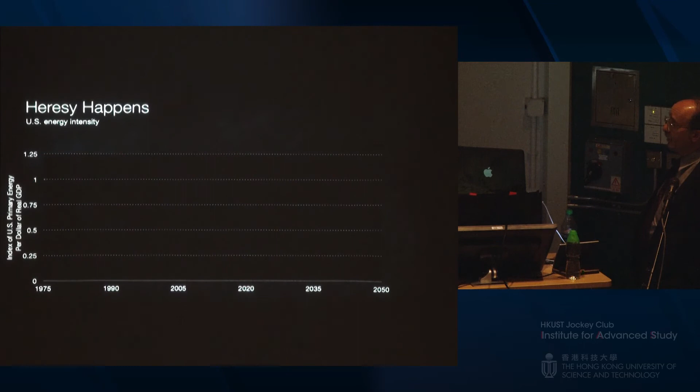To sum up, our energy future is not fate but choice, and the choice is extremely flexible. In 1975, 40 years ago, the US government and industry all insisted that the energy needed to make $1 of GDP could never go down. A year later, I wrote a heretical article in Foreign Affairs saying it could drop by threefold. Well, actually, it's gone down 54% in the first 38 years.

But with today's far more powerful technologies, integrative design, enlightened regulation, more mature financing, marketing, and delivery channels, we now see very clearly in Reinventing Fire how to save another threefold, saving twice what I originally thought at a third the real cost. That doesn't count any future innovation, just what's already happened.

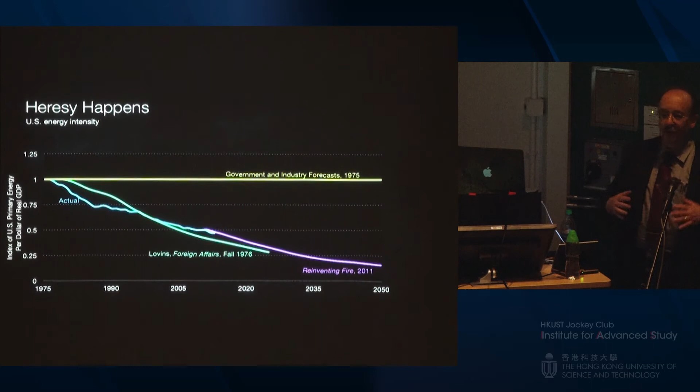So to solve the energy problem, we just needed to enlarge it and integrate it. And the results may at first seem incredible, but as Marshall McLuhan said, only puny secrets, small weak secrets, need protection. Big discoveries, he said, are protected by public incredulity.

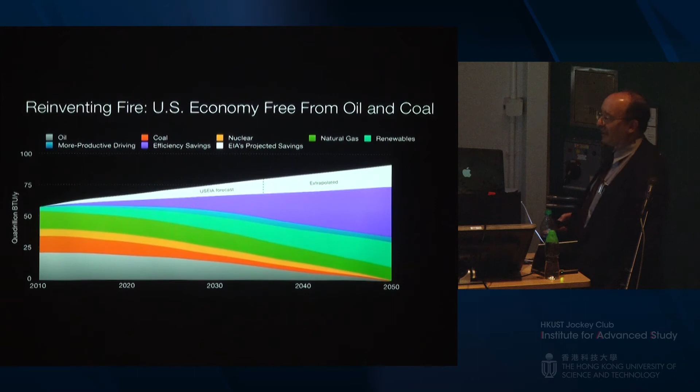Now combine the electricity and oil revolutions, and you have the big story, Reinventing Fire, where business enabled and sped by smart policies in mindful markets can lead even a big country like the United States completely off oil and coal by 2050, saving $5 trillion, growing the economy 2.6-fold, strengthening security, and by eliminating the oil and coal, cutting carbon emissions by 82 to 86%.

Now, if you like any one or more of those outcomes, you could support that transition without needing to like every outcome and without needing to agree which outcomes are most important. So focusing on outcomes, not motives, can turn gridlock and conflict into a unifying solution to our common energy challenge. And these best buys are also the most effective solutions to the big global problems that hazard every country's security and prosperity.

Our preliminary findings show how China could have a 7-fold bigger GDP in 2050 using only slightly more primary energy than now, get half of it from non-fossil sources, all at least 10 trillion yuan cheaper than business as usual if externalities are valued at 0. The 40-odd% lower CO2 and 90-odd% lower air pollution should also greatly improve public health. Energy productivity could rise nearly 6-fold, carbon productivity about 11-fold.